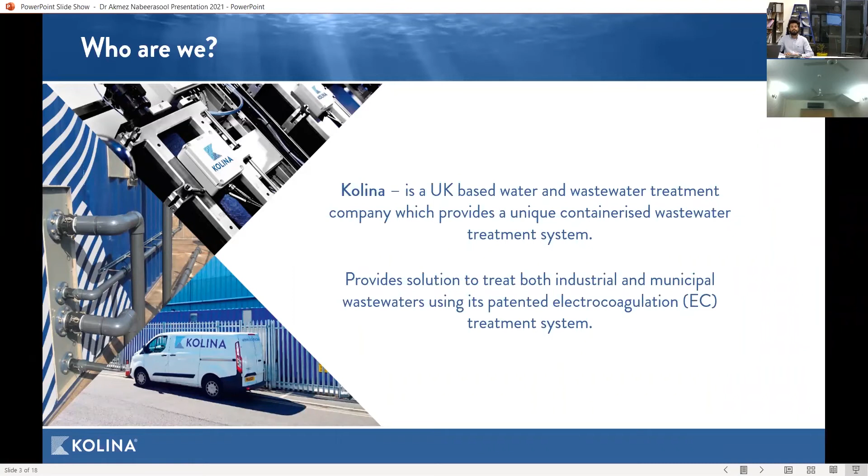Now, a bit about Kolina and where we are based. Kolina is a UK-based wastewater and water treatment company, and it has a unique technology centered around electrocoagulation, and we provide a containerized system. We work in both the industrial and municipal sectors, and for industrial application, Kolina uses its proprietary electrocoagulation technology and complements it with solid separation technologies.

I have a small video which will give you a better idea of what is included, and not included, in Kolina's offering, for instance.

And what does Kolina do?

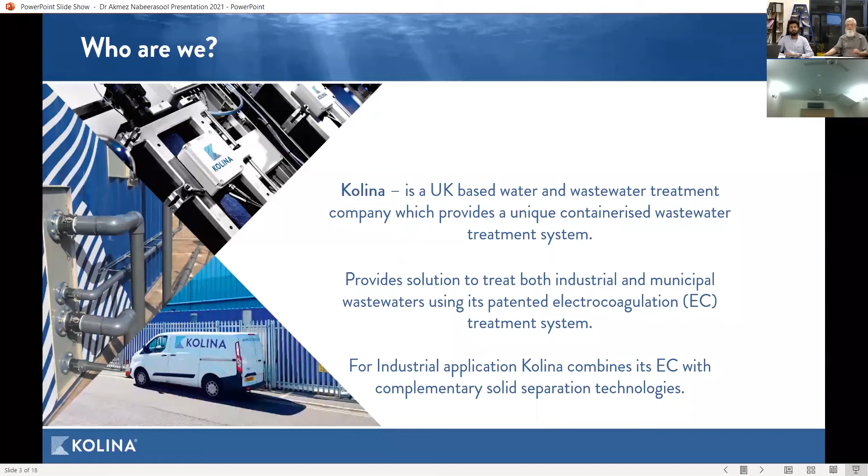So we operate both in the industrial and municipal sector worldwide, and we offer effectively a chemical-free alternative to water and wastewater treatment. When a project comes into the company, what we do is we look at the project from a cradle to grave approach.

So we have a team that looks at the project design, we plan the project, look at the project path with all the different milestones, and then progress through installation, commissioning, and of course, handover of the project to the client. So one of the things which is very important to us at Kolina is the support that we give to the clients and also sustainability.

So there is a big drive currently in the UK. The UK goes through what we call an asset management program. This program lasts for 5 years, and then every 5 years you have new asset management programs. The current AMP cycle is looking at phosphorus removal and also looking at driving innovation towards chemical-free treatment and carbon neutrality.

So the current asset management program in the UK is valued at £52 billion. Out of this £52 billion, £5 billion is just for phosphorus removal. So phosphorus is a big issue worldwide because being a natural resource, it is being depleted.

The problem we have with phosphorus is it's so embedded within industries that you have to find an alternative way to either recover it and capture it and bring it back into circulation. It's a circular economy type approach. And this is what we are doing at Kolina.

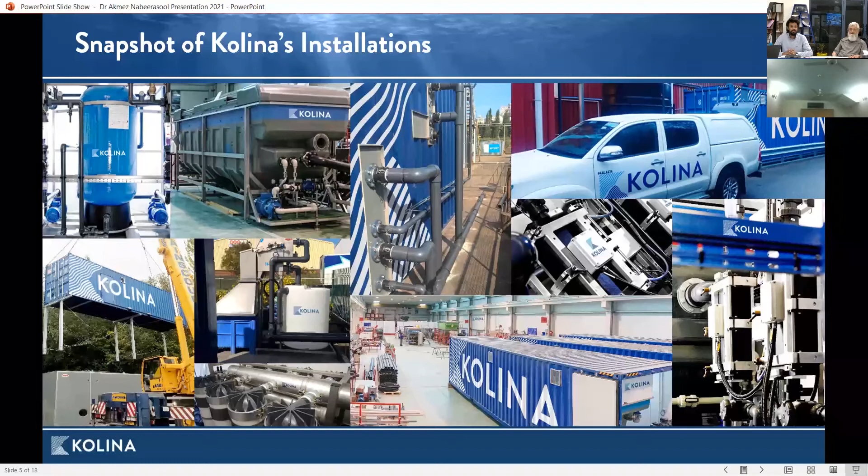So I mentioned about electrocoagulation. I'm not sure whether you guys are familiar with electrocoagulation. It is not a new technology, but the way Kolina has innovated some aspects of it, that is new and that is patented. By basic definition, electrocoagulation uses sacrificial electrodes.

So how is that comparable to some other existing technologies? Electrocoagulation can be compared to a chemical dosing system, for instance Fenton's reaction, where you would use ferric chloride or ferric sulfate. Effectively, what you're looking at is using the active reagent, which is iron. So the iron, what it will do normally in water and wastewater treatment, it will coagulate pollutants from the liquid phase and flock it out and bring it into a solid phase.

The challenge you have with chemicals is you don't have pure chemicals. There's always a number of different counter ions which are present. Electrocoagulation's main advantage is whatever you place, you're going to dissolve it and produce your pure ions. And these ions then are used to take out contaminants from your wastewater.

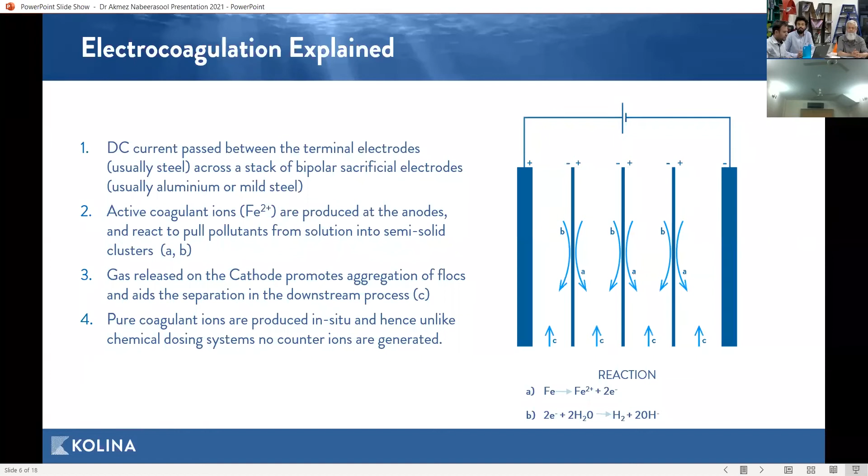So what we do, we take a container, we drop it on the site. All we need from a client is connections for the electricity and connecting the influent and a line for the treated water. That's all we require. And that solution is ideal for many places which suffer from footprint issues or have existing facilities on site.

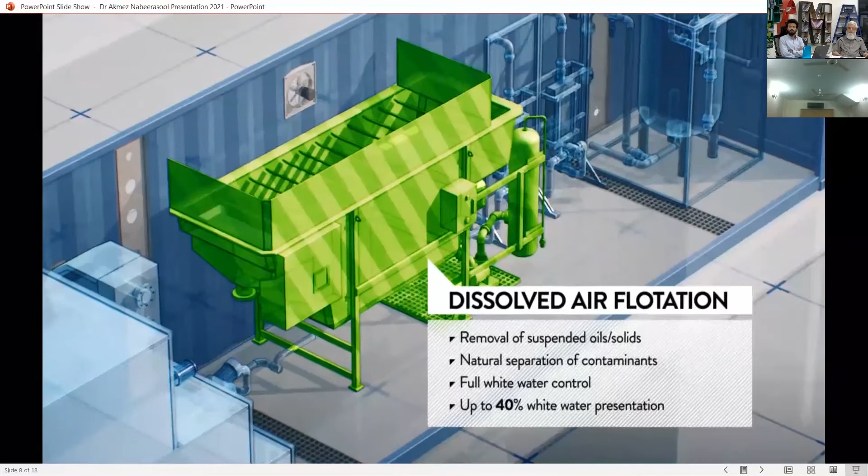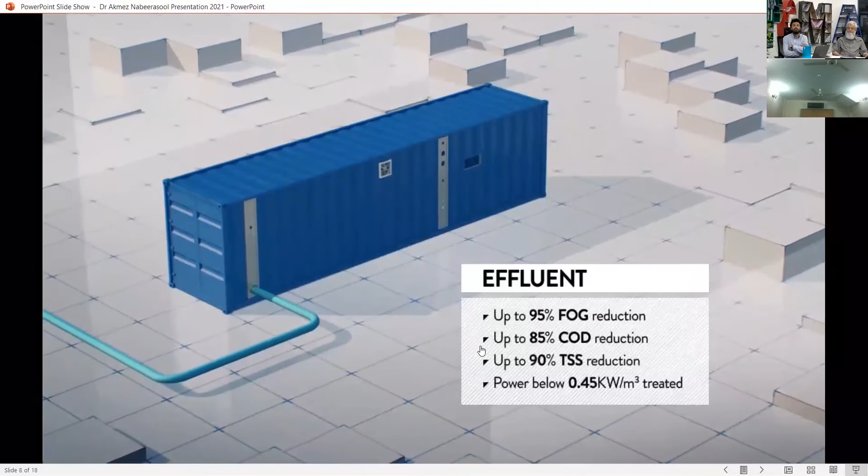So what I've shown you in the video is a complete containerized treatment system. That allows you, within a single container, to have multiple stages of treatment. So on any sites I've worked across the world, there are no two wastewater sites that have the same quality of effluent.

In Kolina's containerized system, we take into account these kinds of issues. So the solid separating technologies that we have up front of our electrocoagulation system enable us to get control on the quality of effluent we want to treat. Screens take out bigger particles of solids, and the electrocoagulation system allows us to dose the required amount of coagulants that we generate. This is modulated by just applying an amount of current.

Once we dose the coagulant, it needs a retention time. The dissolved air flotation system allows for this. It allows the wastewater with the dosed coagulants to get the right retention time to coagulate and effectively flock out the pollutants, which can be recovered as a sludge. This is very important because in the utilities sector we're working in the UK, most of this sludge is phosphorus or phosphate that has been coagulated and removed. This sludge is then suitable to be reused as fertilizer in agriculture, creating a circular economy and allowing phosphorus, a very important natural resource, to be reused. That's one way we promote sustainability.

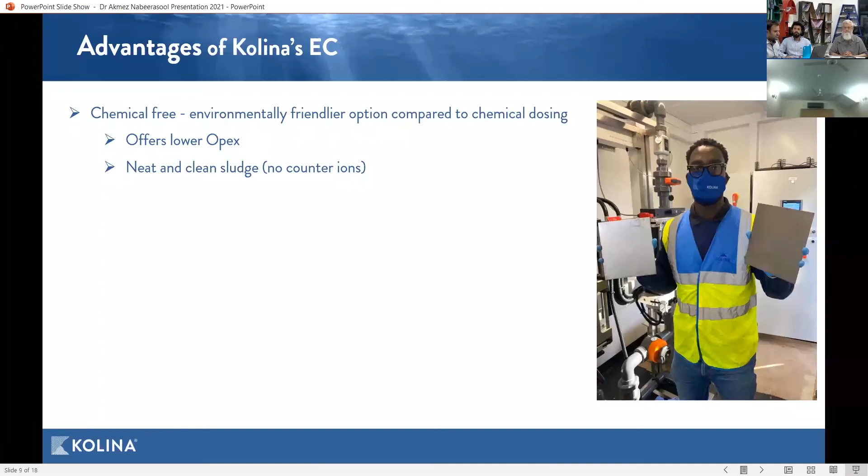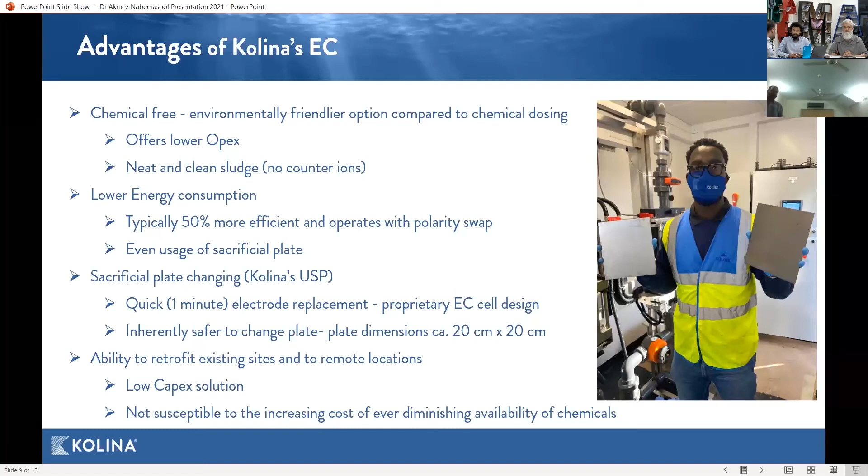So what that means is if you need to change a plate, there is downtime on your treatment. You also need a frame to be able to lift the plates. In the case of our purpose-built system, you don't necessarily need to build a treatment system - all you need is a container. It goes to site and allows you to benefit from all the different technologies present there.

So where is Kolina operating? We have a lot of applications in the UK, in the water and wastewater treatment sector, in the utility sector in Scotland. We work a lot in the food and beverage industry, where we offer two types of services: cleaning the effluent to allow companies to meet discharge consent, but also, in the UK, when you discharge water you need to pay the wastewater treatment system operators a certain fee. This fee is based on a Mogden formula.

DOC and DOC removal - main applications are decentralized treatment, remote application in small municipals, which we do in Scotland, removal of nutrients, phosphorus, ammonia, metal ions removal, COD, TOC and DOC removal.

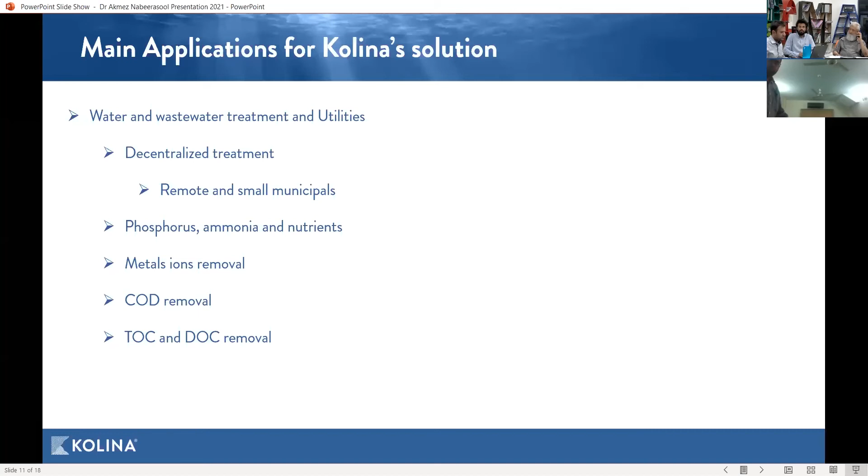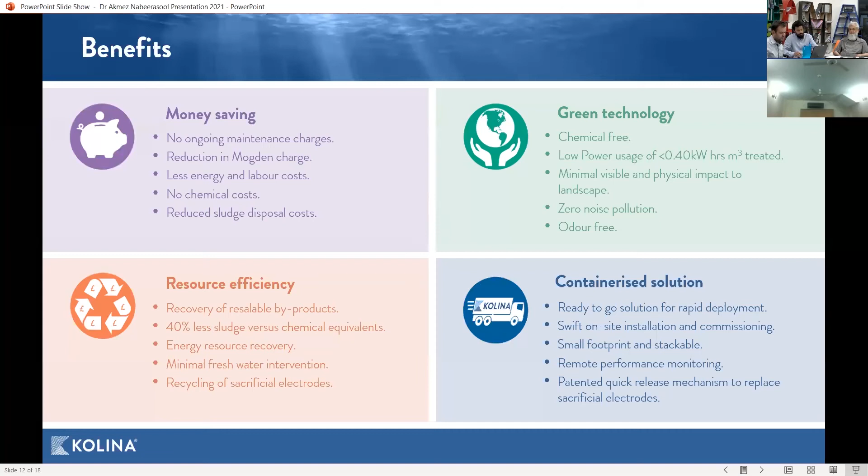This slide gives a brief benefit on how Kolina's technology enables money saving. The technology itself is a greener application, resource efficiency, and a containerized solution. So all in all, we need technologies that can treat new problems we've seen. I've been to a lot of different sites across the world. The main issue you see in many cases is resistance to change, simply because existing technology put into place 20, 30 years ago was fit for purpose, but now it's not - it's still doing a job, but it's not as efficient. With new advancements in analytical tools, we're also seeing contaminants that we didn't know existed before, and the effect these have on the ecosystem.

So there's effectively a need for new technologies to address these new problems. What Kolina is doing is providing not only technology, but a solution to the issue of water pollution. Essentially, we try to extend the lifetime of water - it gives water a second chance. The main challenge facing the world is effectively the water challenge, because the amount of clean water available for use is very small. This is some of the benefits of Kolina's system.

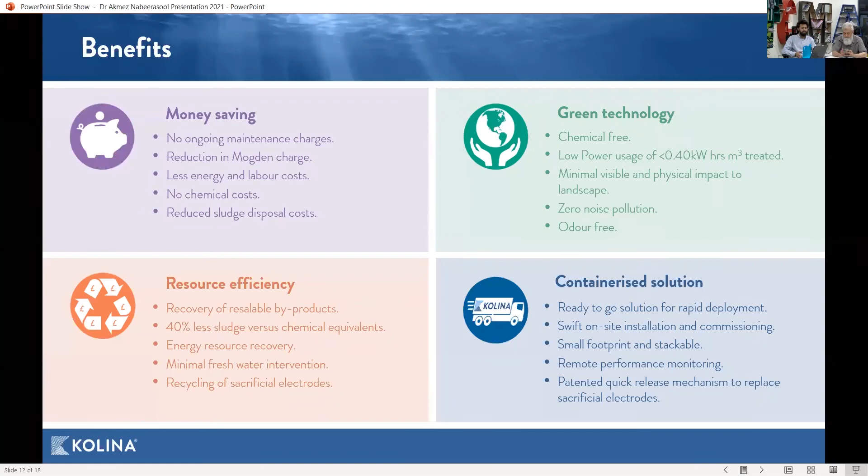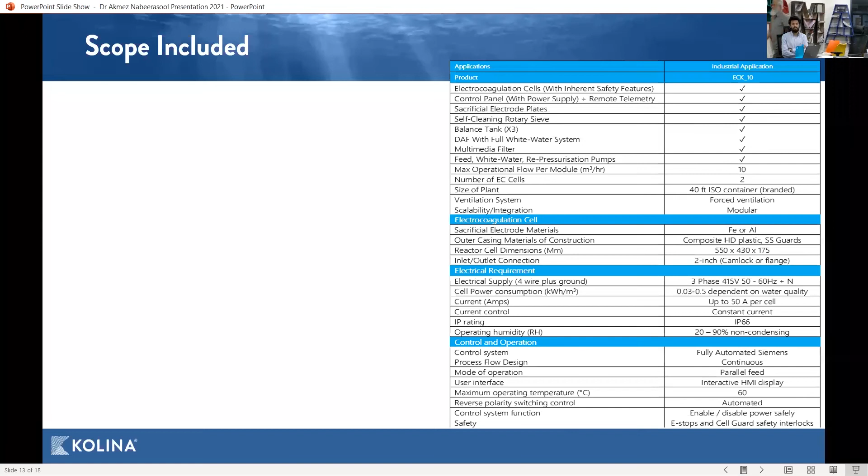This flow table shows different components present in our containerized system. Something very important to us is remote telemetry. This allows me, for instance, to have a plant on site and not need to send one of my engineers to go look at the numbers - I just dial in from my laptop and can set parameters and get the readings. This is what we usually do for any clients: we design the whole system, provide all the required documentation, and give them support and the know-how.

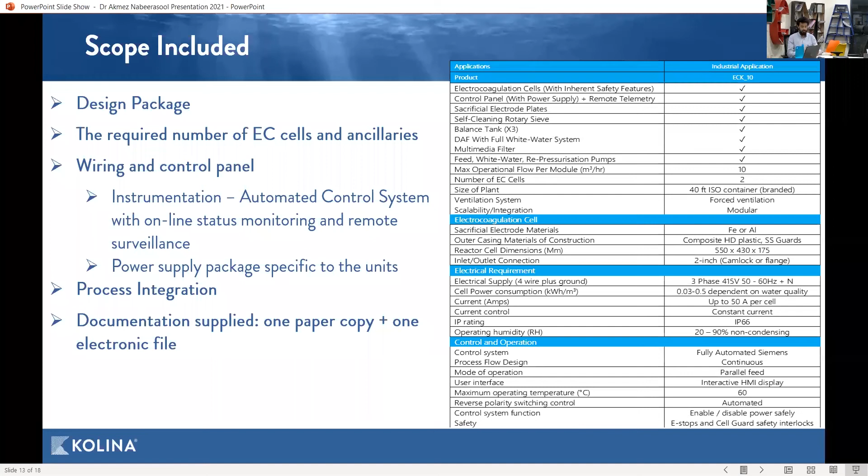Just a few data points: one of our containerized systems can treat up to 400 cubic meters per day - that's a 40-foot container. However, I'm looking right now at scaling the same 40-foot container to double the throughput, to a new design that gets to nearly 1,000 cubes a day using only a 40-foot container, for industrial application. For municipal application, currently we have one in Scotland using just our electrocoagulation cell within a container - we can easily do 80 cubic meters an hour.

So this is mostly industrial application data. We remove a lot of fat, oil, and grease, heavy metals, COD, phosphate, sulfates, nitrates, suspended solids. So a lot of different parameters.

So it's a technology that can do a lot, but doesn't necessarily do everything. One point I'd like to stress is there is no technology on its own that can do everything. What we need is a complementary system, getting the best out of every single technology, and build a treatment train.

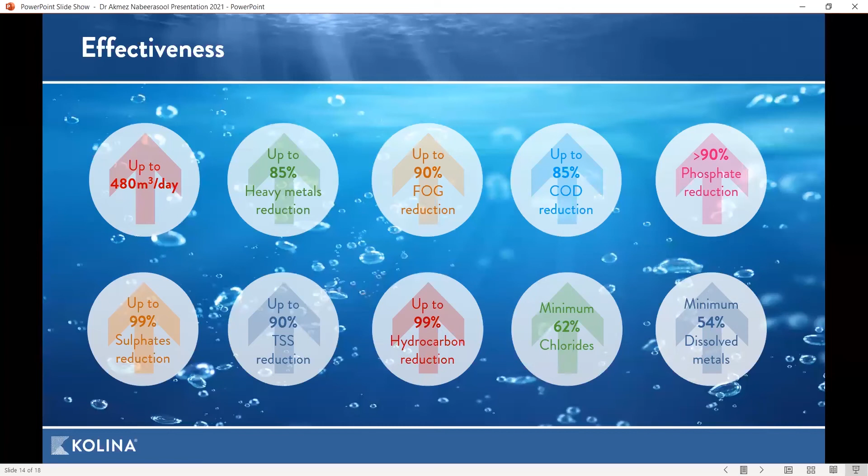This is one of the things I do - I assess different technologies and treatment chains, and see how best to retrofit technologies, but also how to get the best out of existing technologies.